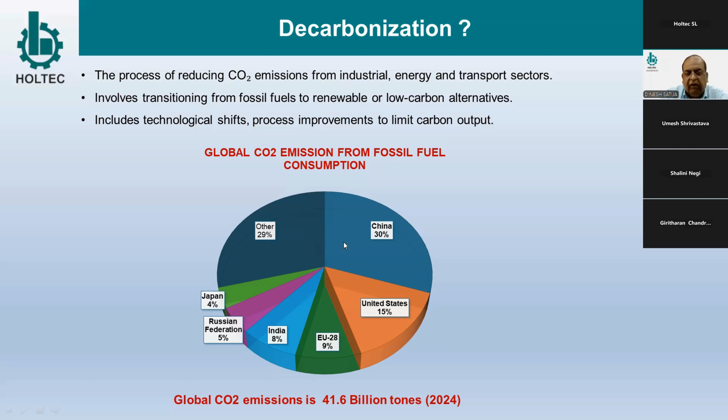Now, why do we need decarbonization?

The first thing which I think we are experiencing in our daily life is combating climate change. We are finding extreme weather situations, either it's raining very heavily or extreme winter or extreme summer across the world. It's not a one country phenomenon, it's across the world.

So it is important to reduce greenhouse gases to slow global warming. Then, protect public health - this involves lowering pollution and improving air and respiratory health. So decarbonization ultimately plays an important role in public health protection.

Another important aspect is ensuring energy security. The moment we decarbonize, we are forced to move from fossil fuel to renewable energy, and renewable energy has to be indigenously produced - it could be solar, wind, or other small forms of energy.

So it substitutes fossil fuel and increases energy security for a country. Just to give you a perspective, India keeps around 9 to 10 days of oil as reserve, just to take care of wars and any eventuality in an abnormal situation, to remain secured - they want to go for another 30 days. So basically, because of all these wars, everybody wants to secure their energy.

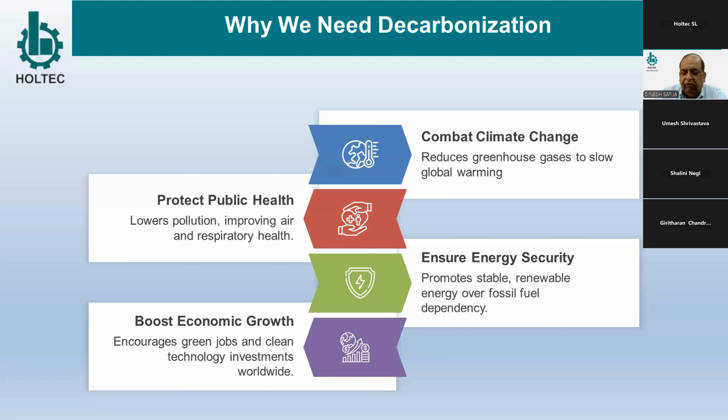Now, what is our national commitment as a country? India is committed to net zero emission by 2070. That was declared or pledged in COP26 in Glasgow on November 1, 2021.

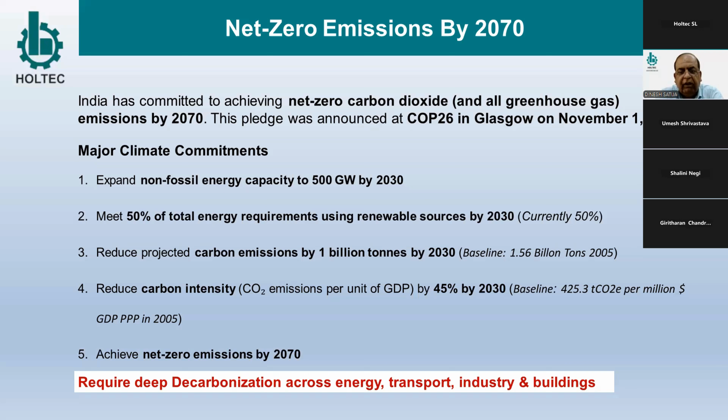The main commitments regarding climate are expanding non-fossil energy capacity to 500 gigawatts by 2030, and India will meet 50% of the total energy requirement using renewable sources by 2030. You must have heard in the news recently, currently we are already at 50% - our energy requirement is coming from renewable energy sources.

We will reduce our projected carbon emission by 1 billion tons by 2030. The baseline is 1.56 billion tons in 2005. Just to give you an idea, this figure of 1.56 in 2005 is projected to go up to 4.48 gigaton if business as usual continues. But India is committed to reduce it by 1 billion tons, so the ultimate target is to remain within 3.48 gigaton at 2030.

Similarly, another parameter is reducing carbon intensity, that is CO2 emission per unit of GDP. India is committed to a 45% reduction by 2030. The baseline figure is 425 tons CO2 per million GDP on purchasing power parity basis, data from 2005. Just to give you an idea where we stand, against 425, the current value is 373.

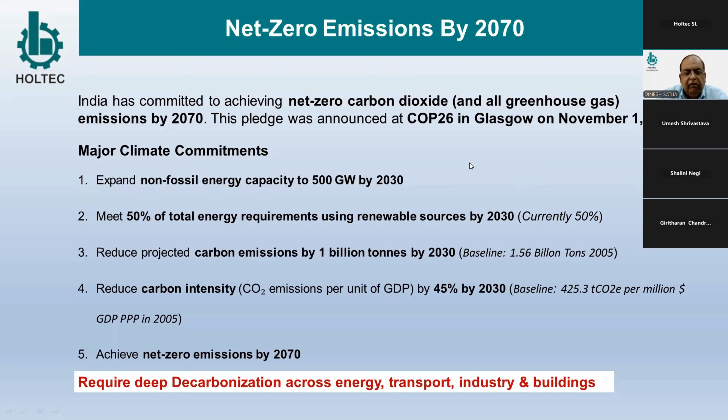Now we'll come to cement. That Indian target was for the whole industry, the country as a whole. We are focusing now on cement specifically. So what are the major sources of CO2 from industry? In the cement industry, there are basically two sources: one is direct, another is indirect.

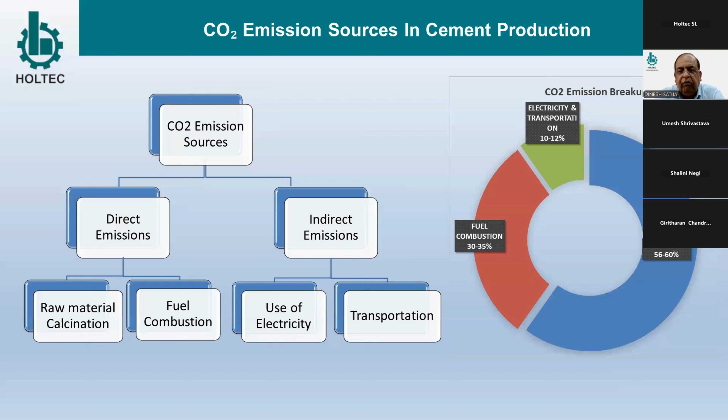Direct sources include raw material calcination. We know, being in the cement industry, that limestone, once calcined, emits CO2. This is one of the major sources, contributing about 56 to 60%. Another source is fuel, because India is a coal-based cement industry, so coal-fired fossil fuel is a major source, coming around 30 to 35% of CO2. The rest, indirect, is use of electricity and transportation, which contributes about 10 to 12% in the overall scenario.

Now we have to decarbonize. So what are the various levers which need to be pressed for our journey of decarbonization, for net zero by 2070? First is clinker efficiency, thermal efficiency, then alternate fuels, use of supplementary cementitious material, decarbonization of electricity, then new age binders which are coming and will come more in future, then recarbonation, cement use efficiency - using cement more efficiently - and then the final one, the mother of all, is carbon capture, utilization, and storage.

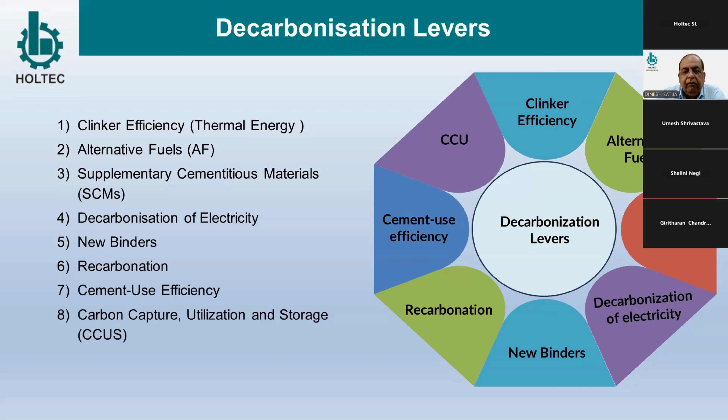Now, Indian cement industry decarbonization targets. If we divide our targets into two parts, one set for 2030, another for 2050: emission intensity will be reduced by 35 to 40% by 2030, and by 2050 it will be 55 to 60%. Then blended cement ratio 75% plus by 2030, and by 2050 shift to net zero cement, so it will be majorly blended cement.

TSR, thermal substitution rate, will be 25 to 30% by 2030 and more than 50% by 2050. Renewable energy use more than 30%, and in 2050 we foresee widespread use of green hydrogen, alternate fuel, biofuels, no fossil fuel. Waste heat recovery more than 60% by 2030 and more than 90% by 2050.

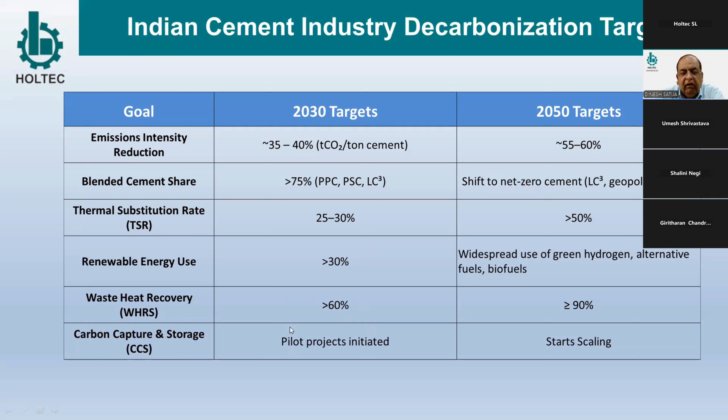90% of the potential. Carbon capture and storage, as per the projection, by 2030 we could see pilot projects initiated. By 2050, we'll see those pilot projects converting into commercial production and bigger size units. So we can foresee that in coming years, maybe after 5 to 10 years, carbon capture will also be realized on the ground in India.

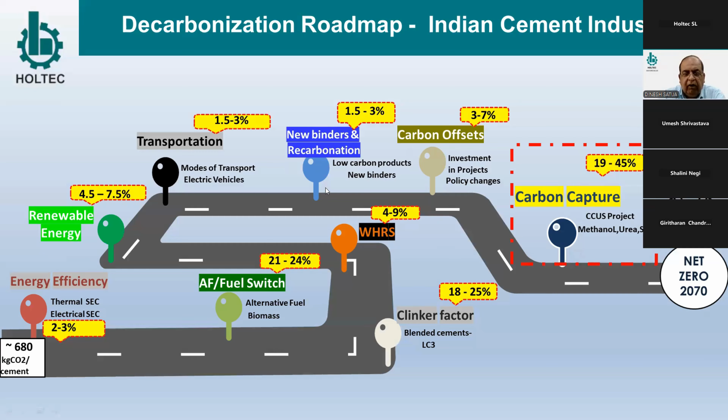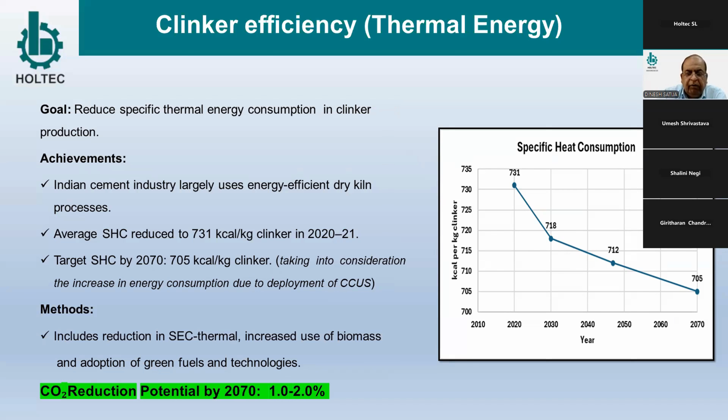Now, clinker efficiency: the goal is to reduce thermal energy from 731, the 2020 country average, gradually to 705. And 705 also takes into consideration the increase in energy consumption due to deployment of CCUS, because by 2070 most plants will be running with CCUS, which also has a power consumption. So once that is adjusted, the final goal is 705. This case will have a 1 to 2% saving with respect to thermal energy.

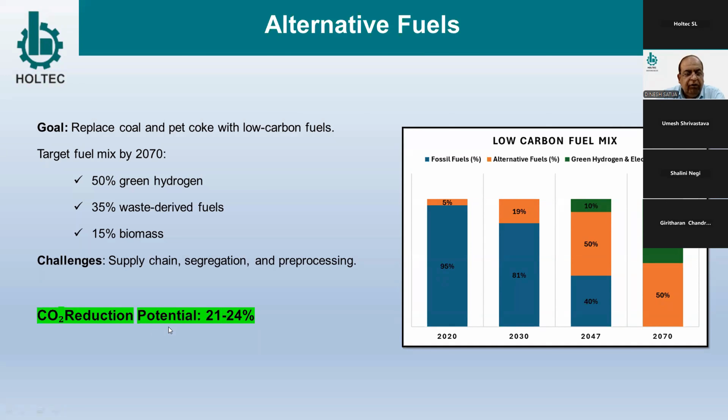Challenges are definitely supply chain, segregation, and pre-processing. These challenges will be faced, and then solutions will also be explored. The CO2 reduction potential is around 21 to 24% in this.

Now the next important lever is supplementary cementitious material. Our aim is to reduce the clinker consumption, the clinker proportion. Currently in 2020, if we take the industry average of 0.75, this is targeted for 2070 to be 0.56. That will essentially use slag, fly ash, calcined clay, limestone, with an increase in proportion of blended cement to 90%, and reduction of clinker factor from 0.75 to 0.56. This has a CO2 reduction potential of over 18 to 25%.

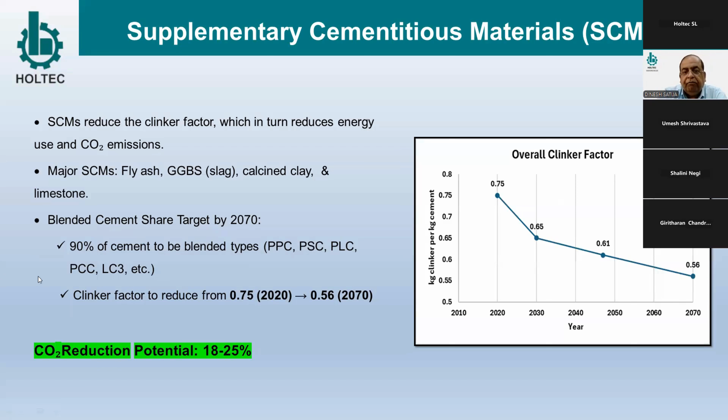If you see the chart for supplementary materials and blended cement, OPC is going down, even PPC is gradually going down, and PLC is increasing. Similarly, composite cement is increasing, and LC3 will be increasing very fast in the coming years.

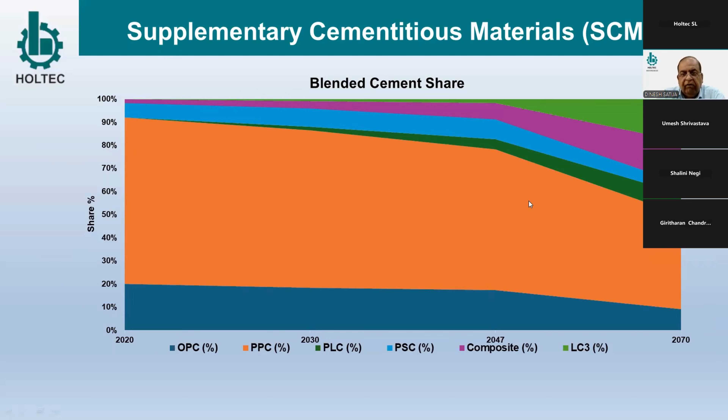Now we talk of decarbonization of electricity. As we know, current industry power generation is mainly through coal. So that is another area where decarbonization will be required. When we talk of power consumption per ton, our target is from 73 to 65, and an increase in waste heat recovery capacity. The current capacity is around 530-538 megawatts, which has a potential up to 1100, even up to 1300 is projected. That remaining gap has to be covered.

Then shifting to green electricity with renewable energy. As we said, we are moving very fast with respect to renewable energy, and the CO2 reduction potential with all these three measures works out to around 9.5 to 18.5%.

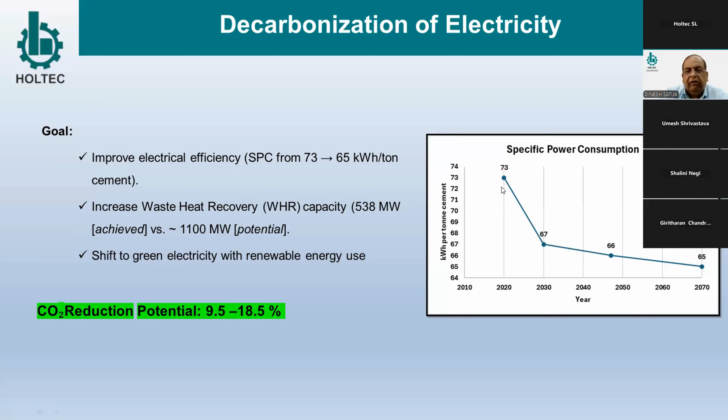The new binders, which are currently not much in use and still in development stage, we can see in another 10, 20, 30 years these will be very important in reducing CO2. Like LC3, it has a potential of 40%.

Calcium sulfoaluminate is another type of cement binder which mainly uses bauxite, limestone, clay, and some other material, but reduces limestone use by only 40%. The burning temperature is around 1200, so it has potential to reduce CO2 emission.

Use of geopolymer is again a very important development we'll see in the future, with 80% potential. Then magnesium-based cements, 100%. Then carbonatable cement. These are all in the developing stage.

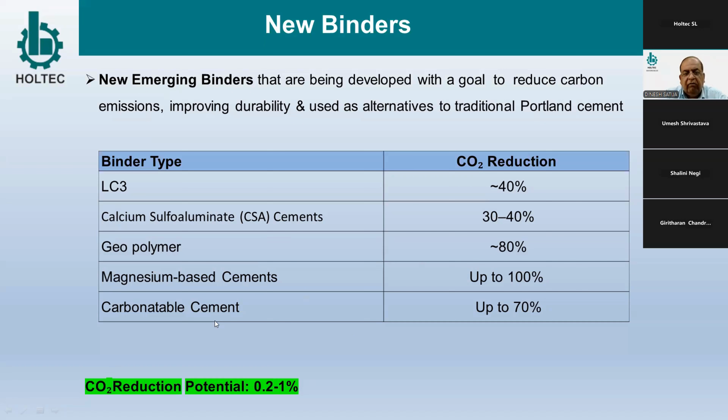One reason these are not coming up fully is because the cost of production is high. But with increase in scale, the cost will also become workable in future. This is what is expected, but CO2 potential is around 0.2 to 1%.

So it is important that this should mostly be converted to RMC. Even RMC functioning and quality control needs to be improved to get the exact design of the concrete, made without any excess cement or other issues. Similarly, use of plasticizer to lower water-cement ratios, and correct size of the aggregates is very important.

We are likely to see advanced practices like precast and pre-engineered building components, which will be manufactured in an environment that is totally controlled and accurate. Use of AAC blocks instead of clay bricks, replacing mortar with adhesive, and construction demolition waste recycling will be used in construction.

Another advanced technology coming is 3D concrete printing, which will allow very accurate concrete design and precise construction. Then automated concrete design systems and optimization of structural geometry. These are the things we're likely to see in future, which also have scope for CO2 reduction because cement use will be very optimized and accurate.

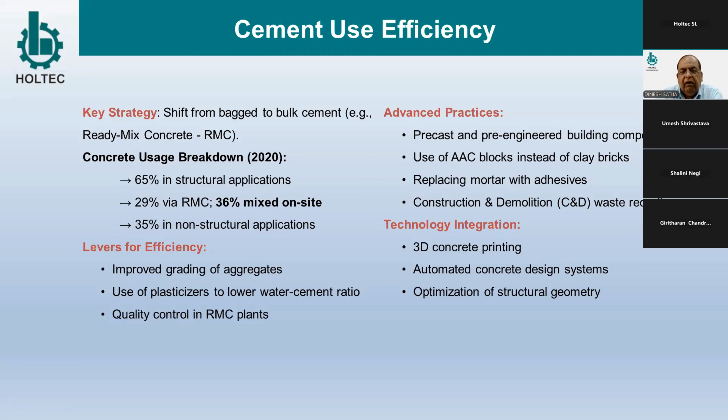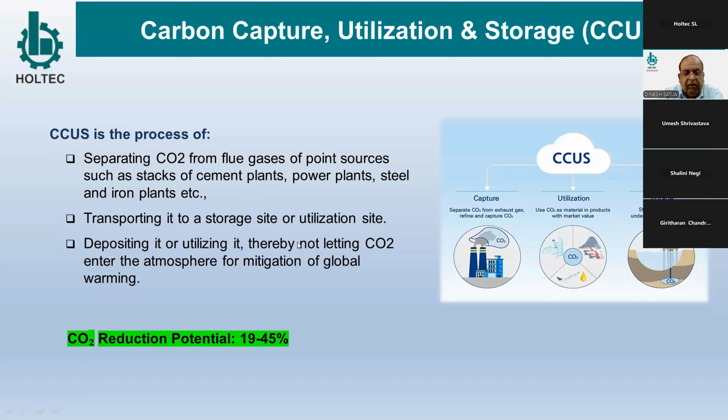There are many CO2 capture options. What we will be talking about, which is more relevant to CO2 capture, is a post-combustion method that involves removal of CO2 after fossil fuel has been burned.

Once we see in our chimney, we can see that CO2 emission is around 18 to 22% from the cement plant chimney. So if we attack that, after the fuel is burnt and CO2 is finalized, we will capture CO2 from there. This method is most suitable for cement plants because fundamental changes required will not be much.

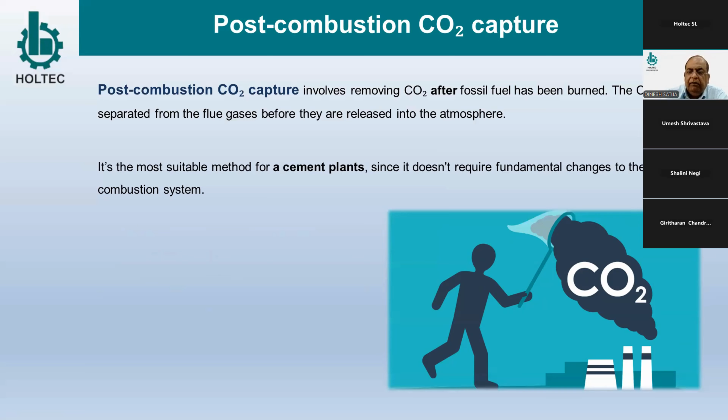There is one technology we discuss here; there are many other technologies which we are not taking currently. We are taking one technology which is amine scrubbing technology. The basic material used for scrubbing is monoethanolamine, a primary amine solvent, used in post-combustion CO2 capture due to its high reactivity. It has high affinity with CO2.

This process is commercially mature and its integration with a cement plant is relatively simple, so it is finding more acceptability with the cement industry. The typical process is chemical absorption, amine based, and is the most mature post-combustion CO2 capture technology. The key performance metrics: CO2 capture efficiency could be around 85 to 95%, and CO2 purity is 95 to 99%. It is energy intensive, 3.5 to 4 gigajoules per ton of CO2 captured — that is the energy requirement.

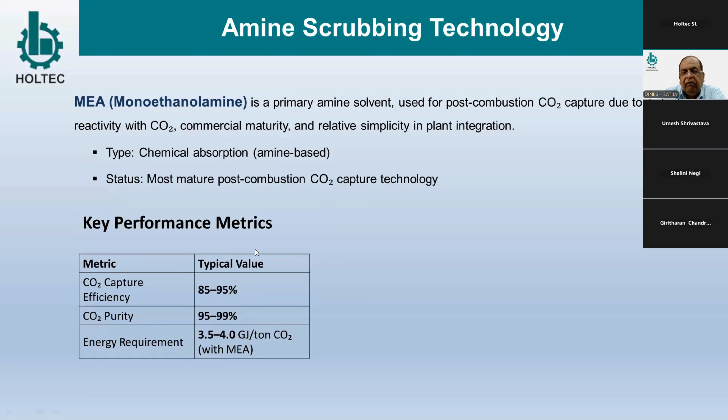We will give you a brief idea of what the process is exactly. In the cement plant, we get flue gases which are pre-treated. CO2 is normally around 18 to 22%, but it also typically has NOx, SOx, dust, and water vapor. All these NOx, SOx, water vapor and dust can create problems with the use of MEA, so they have to be removed first.

So all these gases are removed, the temperature is reduced to around 30 to 40 degrees, and they are scrubbed. SOx, NOx, even dust is filtered out. So what we go ahead with are the gases having CO2, but no SOx, NOx, or dust. That goes to the absorption column.

We call it the absorber. MEA flows downward and the CO2 gas, rich with CO2, moves upward, so absorption takes place there. The lean gas passes from the top and is water washed so that no MEA is carried away and no other pollutants escape. We get lean gas out of the system through the stack, and the MEA rich in CO2 is then further treated.

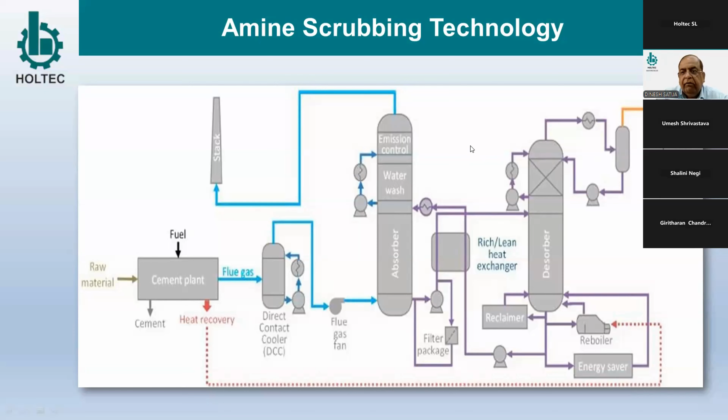So this is a simple process — well, the process is not actually simple, but I have explained it in a very simplistic way. The process is complex.

So now we have a curiosity: what is the status of CCU in India? The current status is no large scale implementation yet. A few Indian cement companies are exploring pilots at this stage. Barriers are high cost, lack of infrastructure, and need for policy and funding support — these are the major barriers. Currently we are not even at pilot stage, or at most we may come to that in coming years. We will see if some pilots become operational in a few plants, which is our target for 2030.

Now, what are the global and Indian initiatives? GCCA and the Global CCS Institute are studying CO2 hubs, storage and financing. Niti Aayog has recommended development of a CCUS cluster, because CO2 could be captured by many plants in a cement cluster. In future, there would need to be some common shared infrastructure where that CO2 is transported, for further use or processed elsewhere. Different uses will come in subsequent slides — challenges are, as mentioned earlier, capex is currently very high.

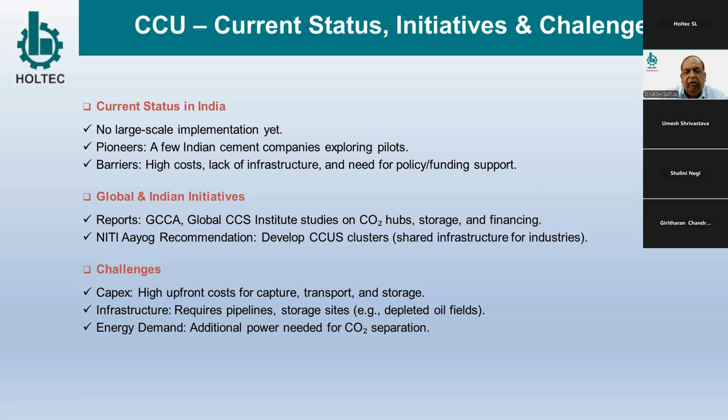As I said, it's expensive. Just to give you a perspective, though in India we have not seen anything, for a capture of 1 million ton CO2, which can be captured through a 4,000 TPD plant, if we take an estimate of capex, it could be as high as 450 million USD. And OPEX could be as high as $25 per ton of CO2. These figures look abnormally high.

Just to give you an idea of how the price falls over a period when economy of scale works: we can now see the solar power plants. If we see the price of solar power in 2010, it was 17 rupees per unit. In the last 10 years, the solar power scale has gone very high. Currently we are producing 50% of our requirement through solar, wind power, renewables. And the current price of solar power is 2 rupees. So you can imagine, from 17 rupees it has come down to 2 rupees, just because the scale has gone very high.

So we also foresee that in future, when the scales go up, the capex, OPEX, everything will come down drastically.

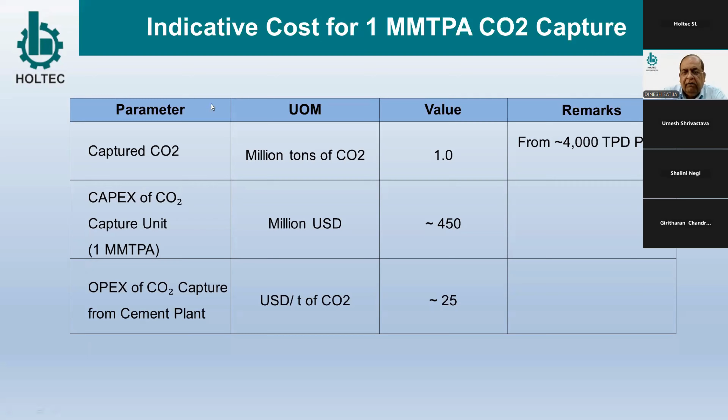So our next question is: what is the utility for CO2 capture? What should we do after capturing it?

If you see this matrix, there are vast uses. CO2 use is not new; industry is already using it. The only thing is, what we will be giving is captured CO2, which we can call green CO2. It can be used in food products, fuel recovery, plastic, fire suppression, inerting agents, and miscellaneous uses like refrigeration and dry ice. We commonly see this in fisheries and the ice cream business, where people use dry ice. Then there are chemical uses too: cement, chemical industry, extractants, mineralization—there's a vast number of usages.

So what we are talking about mainly now in chemicals is basically converting the CO2 to methanol, urea, CO, carbon monoxide, or methane. And from methanol, we can convert this into liquid fuels, fertilizer, or secondary chemicals.

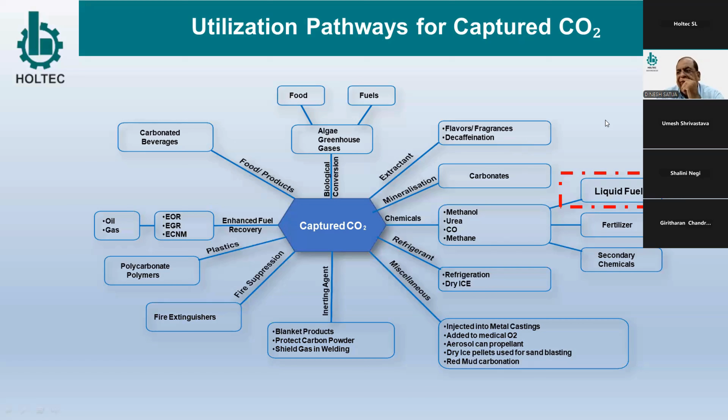So what we will focus on in the remaining slides will be liquid fuel. Because once the cost is very high, CO2 capture is high, so we must think of using CO2 for some very high value products so that it becomes viable. Liquid fuel can be a very good option for a high value product.

This can be used for production of sustainable aviation fuel, which we call jet fuel. One is conventional jet fuel, which comes from fossil fuel. What we will be talking about is sustainable aviation fuel, SAF, which comes from captured CO2, which we can call green fuel.

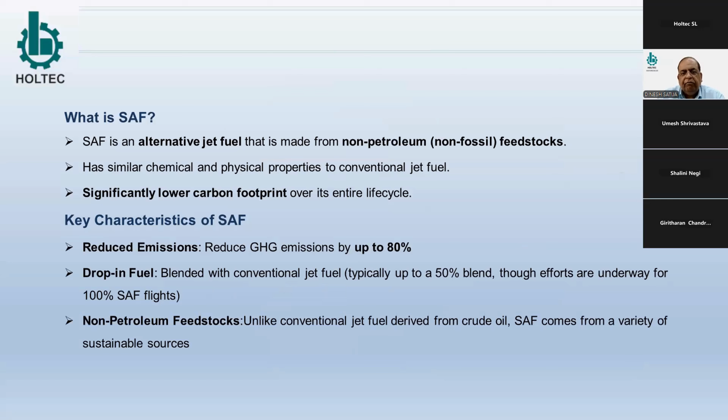So SAF is an alternate jet fuel made from non-petroleum feedstock, has similar chemical and physical properties as conventional fuel, but has a significantly lower carbon footprint.

It reduces emissions, by up to 80%. It's a drop-in fuel, and can be used as blending with conventional aviation fuel, even up to 50%. Some trials have also been made by adding 10-15% SAF into conventional aviation fuel, and it was successful.

So unlike conventional fuel from crude oil, SAF comes from a variety of sustainable sources, and CO2 capture from the cement industry could be one source.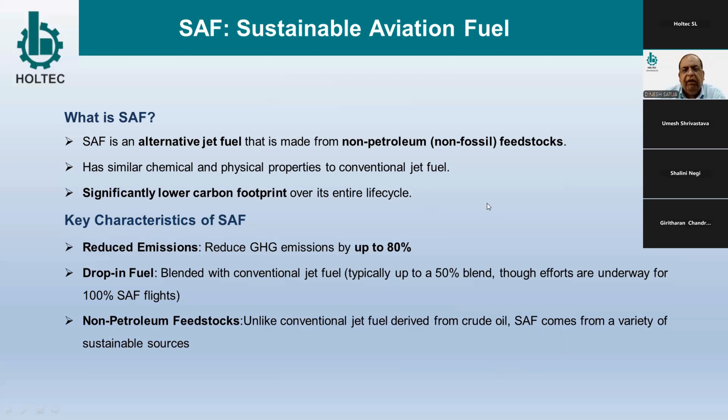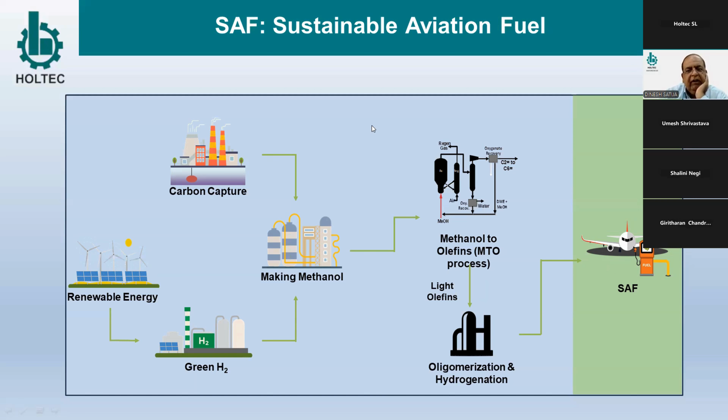This is a simple block diagram because we are talking of sustainable fuel and carbon neutral processes. Besides carbon capture as our feedstock, we need renewable energy and green hydrogen, and CO2 will be converted into methanol. Methanol will be converted into crude aviation fuel, and then processed further to make the final version of sustainable aviation fuel. This process is very much possible, and we could see this kind of fuel coming in future. It could be used in mixed form, and it will have a lower footprint, so it will be in demand because the aviation industry has to go carbon neutral, making this an important, high-value material for them.

Just to get a global perspective with respect to India, EU, China, and USA, if we talk of average clinker factor, it is around 70 for India, 75 for EU, China 65 to 75, and USA 75 to 80.

AFR use is around 5 to 10% in India, which is quite low but catching up now. EU is 40 to 70%, China is 10 to 20%, and US is 20 to 25%.

WHR adoption has picked up in the last many years. 50% of plants are now having WHR in India, 90% in EU, 80% in China, and 70% in USA.

CCUS progress: in India, we can only say it's at a pilot stage, with more coming in future years. In EU, some of the CCS are in operational stage, initial operational. China is again in early stages. US is in the scale-up from pilot to commercial.

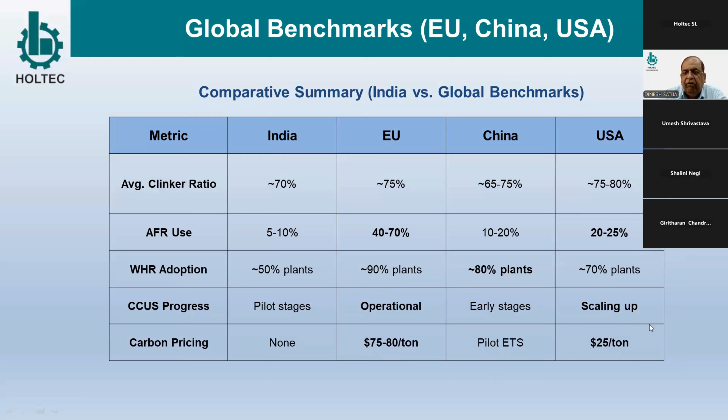One important factor is carbon pricing, which improves project viability. In India, still nothing is there, though this kind of trading will be coming in future; we are still in the formation stage only. EU has operational pricing, which may be variable but typically 75 to $80 per ton. China is again at a very initial stage with no firm policy. USA is less than EU, maybe around $25 per ton.

If we talk of decarbonization initiatives in the Indian cement industry, we will take two groups. Installed capacity of 60 million and 184 million. Renewable energy of 300 plus megawatt, wind plus solar, and another 150 megawatt, with 40% total energy from renewable in one case and 25% in the other.

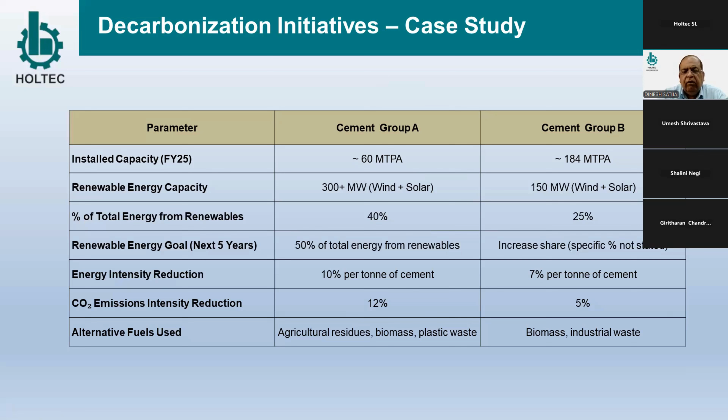So we can see renewable energy has gone up, with their target for 50%, and in another case it will be significantly increased. Energy intensity reduction is 10% and 7% respectively in the two cases, and CO2 emission intensity reduction is 12% and 5%. So this is the current situation with the two groups, which shows that most plants are now pushing for decarbonization with significant speed.

If we talk of leading projects and partnerships, we can see NTPC Green and Honeywell have signed an understanding to develop SAF, where NTPC's power plant will capture CO2 and SAF will be produced, and green hydrogen plants will also be installed in Vizag.

IOCL and L&T Energy Green Tech have come to an agreement. They will be putting up a 10,000 TPA green hydrogen plant in Panipat Refinery, Haryana.

BPCL and Sembcorp have a joint venture for a large green hydrogen production portfolio. AM Green Greenko is using 4,500 megawatt RE from Coal India Limited to produce green ammonia and hydrogen. GAIL is going for a 10 megawatt electrolyzer for green hydrogen. Oil India Limited has a 99.9% pure green hydrogen pilot for fuel cell application.

And we know Adani New Industries Limited is coming up with a huge complex at their Mundra site. It will be a 1 million tons per annum green hydrogen plant, which can be scaled up to 3 million tons.

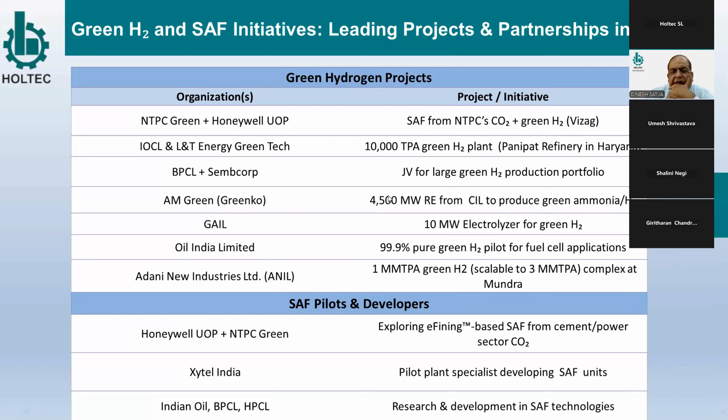Now, if we talk of Holtec's role in decarbonization, we have been carrying out studies. It could be energy and process audits for reduction of specific heat consumption, specific power consumption, and process debottlenecking for capacity enhancement, which can ultimately end up with fuel and power saving.

Then clinker factor reduction, use of SCM to increase consumption, WHR integration, AFR integration with use of alternate fuel and raw material, and grinding optimization for reduction of power consumption in cement grinding, either directly or by increasing production.

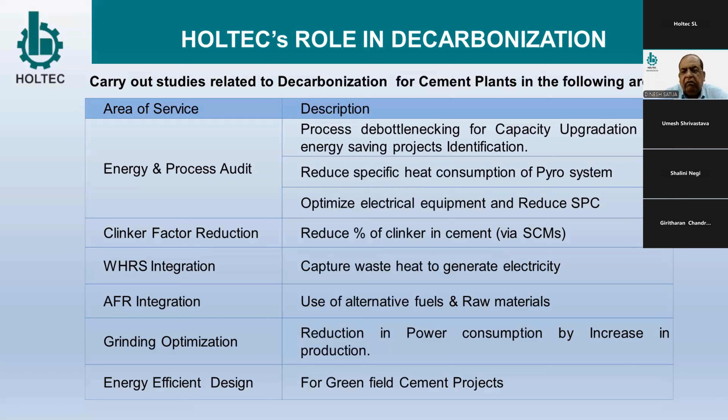Then energy efficient design. Even for greenfield projects, our effort is to have the most efficient design right from the concept stage. The execution also involves complete services. We have setup for basic engineering, procurement, detail engineering, equipment inspection, site supervision, etc.